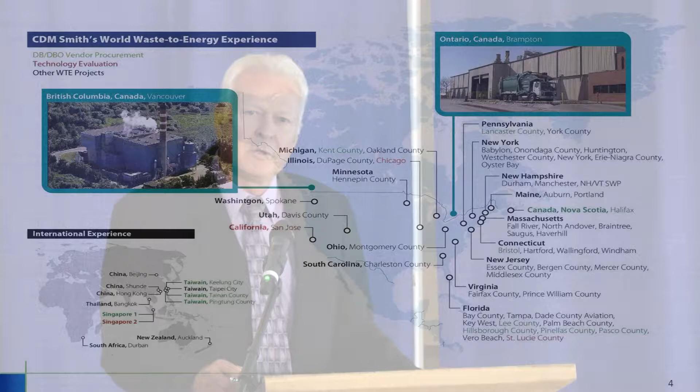Just recently, the map doesn't reflect this, but we're about ready to wrap up our involvement with the facility in Dublin, Ireland. They just built a brand new 2,000 ton per day facility. And I hail from Tampa, Florida.

We have quite a few solid waste professionals in Tampa. We do a lot of work in Florida. Florida has the highest number of waste to energy facilities in the United States, with 11. So that's a little bit about who CDM Smith is.

My career, 27 years ago, after 17 years in the commercial nuclear power business, I decided to do something a little less complicated but more exciting. And I became involved in a solid waste project as a construction manager.

So I showed up for work one day and in less than three years helped build a plant just north of Tampa. I showed up on day one of that project, but surely there were meetings like this, workshops, part of a feasibility study that all took place years in advance of my first arrival on that project. And so I think this is a similar situation here.

This is the beginning of your effort to figure out what you want to do, where you want to do it, how you're going to do it, and when you're going to do it. And those same decisions had to be made by the commissioners of Pasco County, Florida. And sure enough, they did.

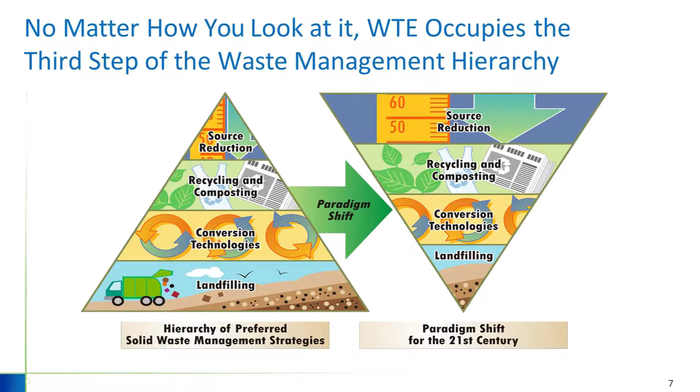Just a simple little diagram, but it paints the picture of what we're trying to do. This little diagram here on the left shows who's doing the work, okay? Today in America, landfills are predominantly doing the work. 83% of the waste is put into landfills today. What we're really trying to achieve is a paradigm shift where we're turning that pyramid up on its head. We want to do less work in the landfill and more work with the other rungs of the hierarchy.

So what I'm here to talk mostly about today is the waste conversion rung, the third rung. And included in waste conversion, we have waste to energy.

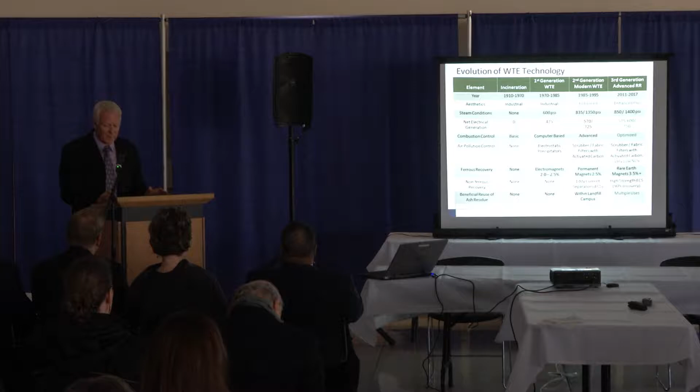So a lot of people make their living in this industry, and it's changing and advancing every day. It's not stagnant. Just because we haven't built very many of these facilities in the last 15 years doesn't mean this industry is stagnant. We are rebuilding these facilities, we're expanding these facilities, they're building them left and right in Europe and China. So we can take advantage of all of that in your situation. You certainly want to leapfrog where everyone else has already been.

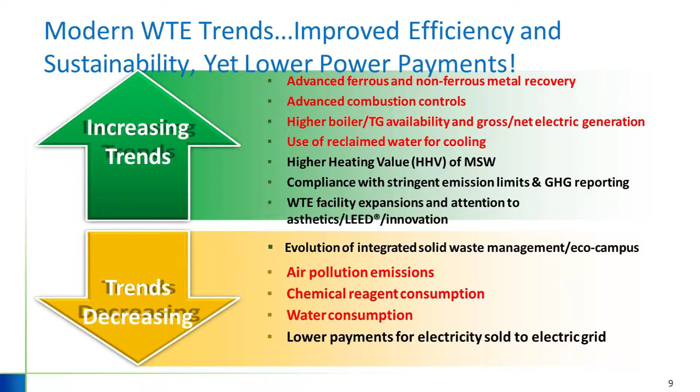But the last little bullet there is lower payments for electricity sold to the electric grid, and that's the sad news. And I have some suggestions for that. So this is just a short list. I have a long list of benefits of waste to energy to the electric grid.

And I want to bring to your attention something I discovered last week. The Department of Energy has recently proposed that any power plant that can store or stockpile 90 days of fuel should be compensated for that attribute, because of Superstorm Sandy and hurricanes and forest fires and things of that nature, or the polar vortex. All of these things are very disruptive on the electric grid. And when the wind doesn't blow and the sun doesn't shine, the renewables aren't going to get you back on the grid. You need baseload power sometimes to recover from these types of incidents.

So the DOE is now proposing, and this is beneficial to the coal and the nuclear industry primarily, let's be honest. But the fact of the matter is a waste-to-energy plant has an endless supply of fuel, especially after an extreme weather event. Just in my neighborhood, I live in Tampa, just this Saturday, they finally picked up the rest of the debris that's been on our curbs for the last 2 months after Hurricane Irma. So these natural weather events can really increase the fuel supply, if you will.

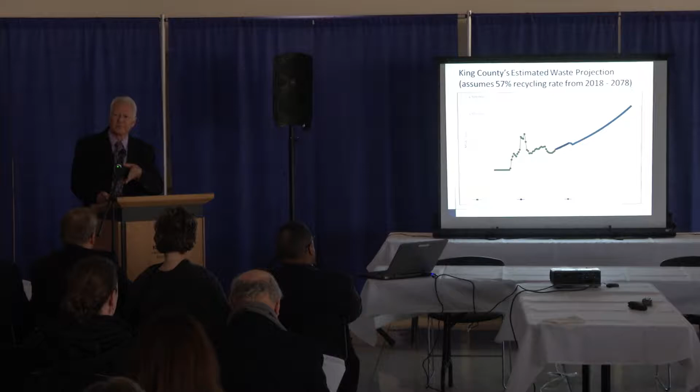And so anyways, that concludes my introduction. So in following Curt's lead, are there any questions over what I just shared with you? Do you want to ask anything at this moment?

My question was that you were talking about this being close to the grid in the community, but the report says you need 20 to 40 acres to build a facility to serve King County. So I made the assumption that sites are being selected and communities being spoken to, or are we just too early to do that yet?

No, again, we weren't really challenged with helping find a site at the moment. The 20 to 40 is a reasonable estimate. I've seen, and it depends on the size of the facility. I saw a facility in Alexandria, Virginia on 3.5 acres, and I swear there isn't a blade of grass on that facility. And you could never do that again, because today you have stormwater management rules. So typically, 20 to 40 would be a reasonable amount of property.

Again, it depends on the size of the plant, and if we harvest the rainwater and use it in the process, which we'll talk about in a minute, then you don't need so much real estate for stormwater treatment and stormwater collection. So I would say 15 acres would press the limits on the low end for the type of facility you're talking about.

Thank you. Okay, so now we're going to talk a little bit about your existing conditions here. In the light blue, that's the waste projection curve from 2018 through 2078, a 60-year horizon. As you can see, it's accelerating. It's growing quite rapidly.

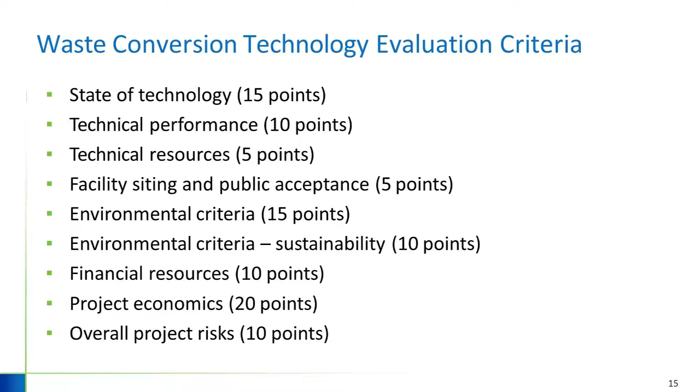So we have two technologies that we call proven: mass burn waste energy, that's thermal combustion on a movable grate; advanced thermal recycling, ATR, which is very similar—that's what they often call it in Europe. We also looked at RDF facilities, refuse-derived fuel facilities, and then gasification and pyrolysis technologies.

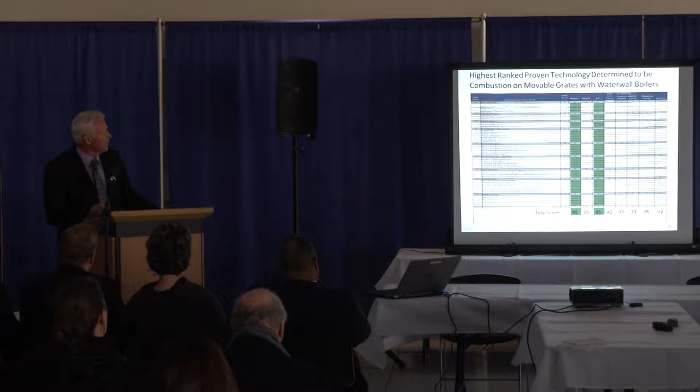But anyways, the bottom line is that mass burn, thermal processing on movable grates with a water wall boiler—that's tech talk, but I'll show you what the grates look like—and the water wall boilers are just tubes that encase everything and capture the heat. Mass burn and ATR were the highest ranked, so that's what we would recommend for King County to consider today.

You don't want to be first on new technologies. You may not even want to be second. You want something that's proven. You want something that's reliable, robust, and has met the rigors of time. That's what these technologies have done.

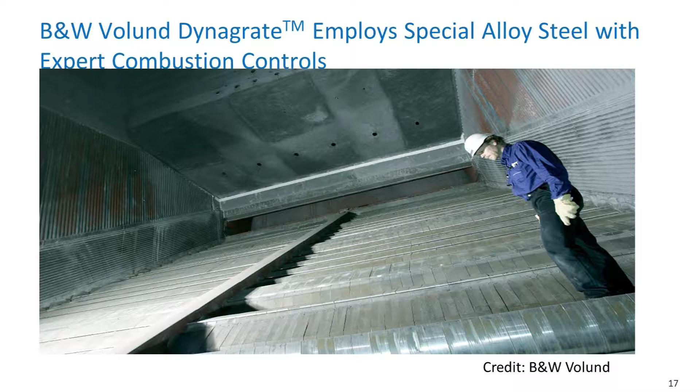This is a grate, a modern grate system. This is the furnace of a small boiler, provided by B&W. This is their magic grate, which was recently employed in Palm Beach County for the first time. It's called their Dynagrate, and it's very clever.

It's water cooled, so each of those runs is on an incline. The waste starts at the top and migrates down, and those grate bars are constantly rotating and moving, just like a stoker—what you'd do at your fireplace at home. You'd stoke the fire when it starts to burn down a little; you want to agitate it. So these furnaces are constantly agitated.

They use alloy metals, and they have Inconel on the walls of the boiler tubes—this is it. This is an engineer's dream here; we get excited about this stuff. But it represents some major technical breakthroughs.

You get far more reliability with a water-cooled grate. You don't burn as hot, you don't melt stuff as much. And the Inconel, it's like good and plenty—it lasts a long time. Whereas in the old days, you'd have to rebuild your boilers every 3, 5, 7 years. We're getting a lot better life out of these things today.

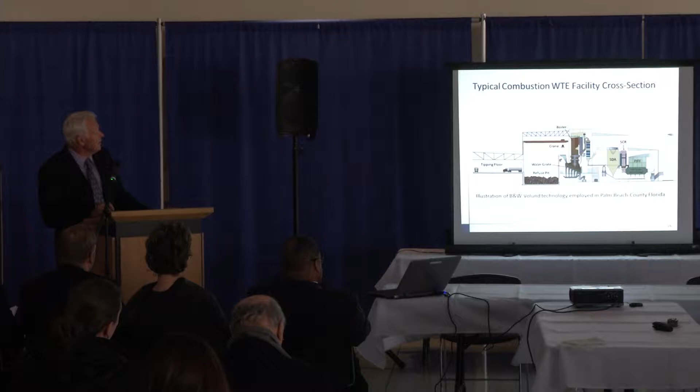And this is a cross-section—this is a cross-section of the new plant in Palm Beach County.

Fully enclosed, a tipping floor where the waste is received, a pit that stores anywhere from 8 to 10 days worth of fuel, and a crane that picks it up and feeds it into a furnace. It flows by gravity onto those grate surfaces that I showed you, where it's agitated and combusts thoroughly. The heat's recovered as energy, and then the exhaust gases are heavily scrubbed by a scrubber, a fabric filter, and in this case what's called an SCR, a selective catalytic reduction technology, to further remove some of the NOx compounds.

NOx compounds are precursors to smog. It's the pollutant du jour in this industry, the last of the pollutants that has to really get more thoroughly addressed, and it is being addressed.

So again, garbage in—you can see a grapple picks up 8 to 10 tons at a grab and feeds it into the furnace—and what comes out is significantly reduced in volume and weight, and it's been sterilized and stabilized. That ash, when put in a landfill, doesn't create methane, doesn't give off bad gases. As a matter of fact, the leachate from a modern ash monofill almost meets drinking water standards, with the exception of chlorides, salts, and sometimes aluminum. So it's fairly clean material.

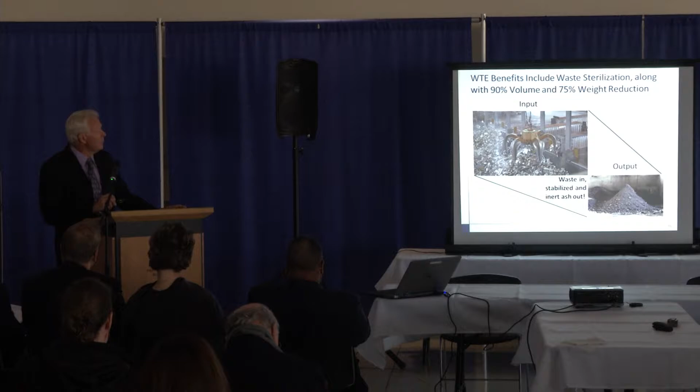But the 70% represents a huge opportunity for combined heat and power projects. These are typically done in the northern climates, where you need district heating, where you can use steam for heating cities. Indianapolis is the furthest south—Nashville still has a thermal system, but they use natural gas now. Indianapolis uses waste and provides steam to their heating grid, but most of the heating grids are in the northern climates, and Europe has a lot too.

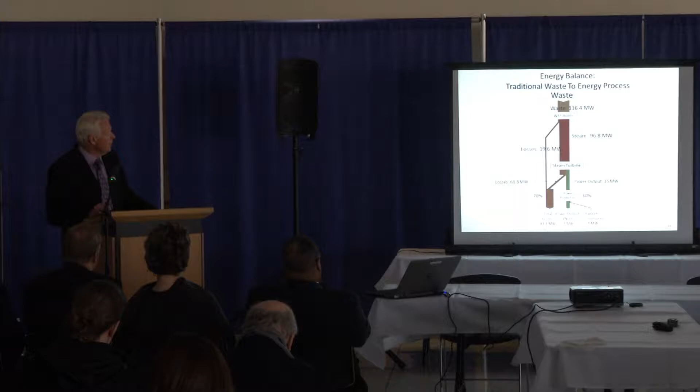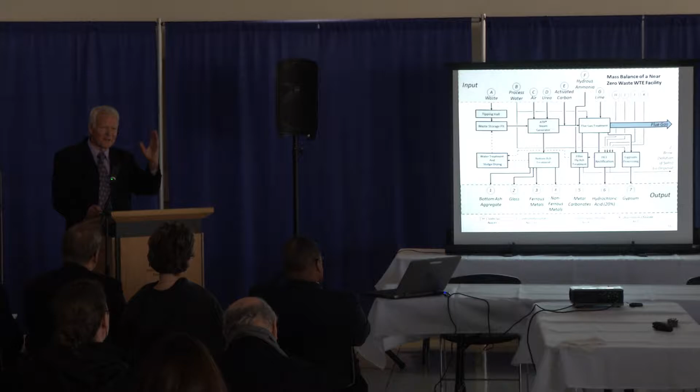So that really covers the existing conditions for your system. But I'll point out that you have 8 transfer stations, 1 landfill, and a privately operated MRF, or several MRFs. So you already have some of the major elements of an integrated solid waste management system.

So what we did is ask, how do we size this facility? One option is that we could size it so on day 1 it's running at full capacity. But what happens is, because your growth continues over the next say 20 or 30 years, you end up with excess waste—bypass waste, as we call it—waste that has to go somewhere else, whether to a recycling program or to the landfill. That was one option we looked at.

Some of the advantages are that you're running full steam ahead—you're not throttling your plant, you're always at maximum power. You have a smaller facility, lower capital cost, and it forces you to deal with your excess waste in some other way, i.e. recycling. That would be the preferred option, or at least that's what people would tell you.

So the disadvantages include you have excess bypass waste that you now have to deal with, and it eliminates the opportunity for a regional project, because now you don't have any other capacity to offer any of your other communities that may want to send waste your way.

We chose instead to do what we said, eliminate bypass waste. We were going to size the facility so that it had excess capacity on day one, and was at full capacity at the end of its financing period, whether that was 20, 25, or 30 years. This results in a bigger facility with a higher capital cost. It gives you excess room to grow into, and excess capacity to market to neighboring communities or special waste programs. So that's what we chose, and I'm going to show you illustratively the diagram.

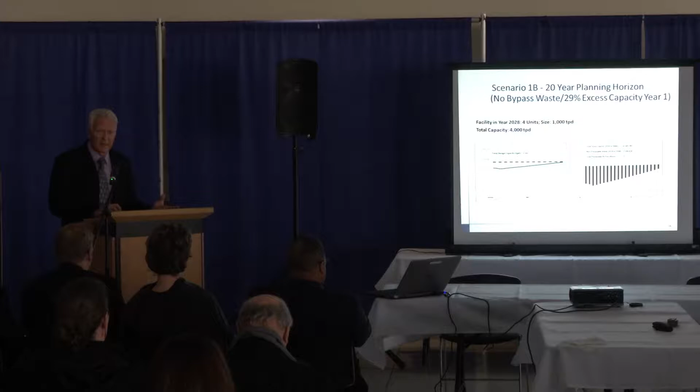On the left you can see your waste projection curve in red, and the blue line represents the size of the waste energy plant, in this case 4,000 tons per day. That line intercepts the curve in year 20. So all the area underneath here is excess capacity that you either use to your advantage or just run your plant at a lower rate. This diagram shows you have excess capacity early on, and as time grows and your waste stream grows, you're slowly converging on where those two points meet. This is a 20-year scenario, and in this case, the initial size has 29% excess capacity.

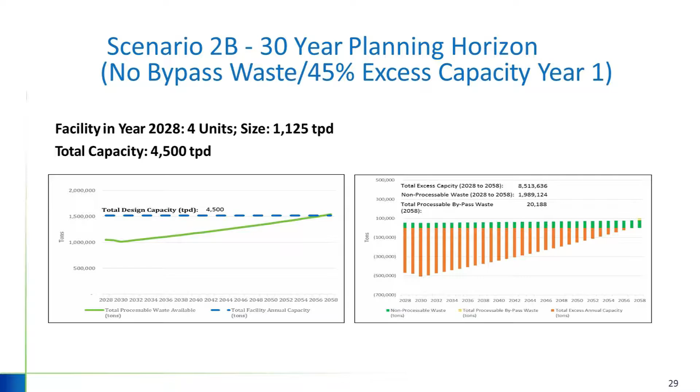Then looking at the 30-year scenario, same story, only now you're looking at a longer horizon, and where those two lines meet now requires a 4,500 tons per day plant. It's a bigger unit, costs more, and again has a lot more unused capacity that you could market, or it's idle.

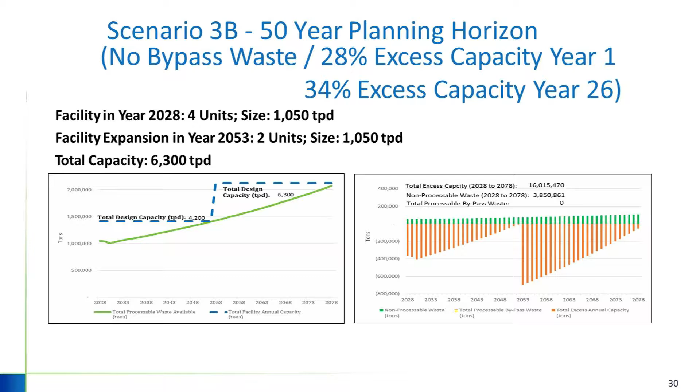Then looking at a 50-year scenario, we went to the midpoint, 25 years, and sized the plant for 4,200 tons per day, then in year 25 added another, whether a new plant or additional capacity remains to be seen, but 2,100 tons a day of additional capacity are required midway through in order to intercept that growth curve at year 50. So again, you see excess capacity declining over time. The new unit comes on, or the expanded unit comes on, with excess capacity until you get close to the end.

So those are the three scenarios that we looked at.

And just to give you some comfort about the size of these facilities, you're not the first. There's a facility in China under construction today being built for 5,612 tons a day, 6 units, using that B&W technology I showed you a picture of, also employed in Palm Beach County, Florida, a very similar unit. Palm Beach County was the last plant built in America, in 2015. It has 3 units of B&W, 1,000 tons per day each. Honolulu expanded recently with 1 unit, 900 tons a day.

It uses Martin GmbH out of Germany, and it's been in operation for the last 5 years. Pinellas County, Florida is like the granddaddy of these facilities. It was built in 1985. That's why we're spending so much time there now, putting Humpty Dumpty back together. It's 37 years old, with 3 Martin mass burn units at 1,050 tons a day. Delaware Valley, Pennsylvania has 6 rotary combustors. They don't make them anymore, but nevertheless they're there, with a total capacity of 3,510.

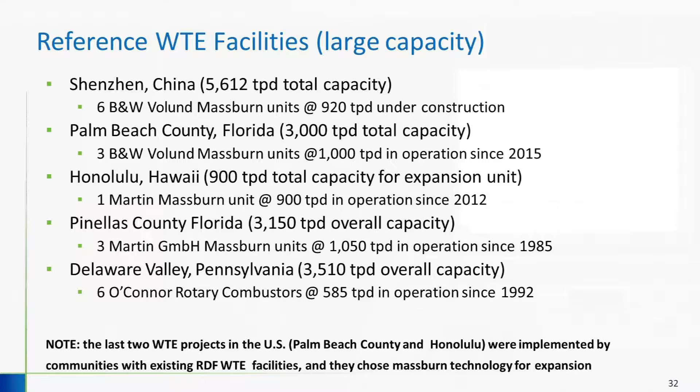So there are a lot of large plants out in the world that we call reference plants, so you don't have to be frightened that you're stepping into the never-never land where no one else has been. Also note that the last 2 plants in America were done by communities that already had a waste energy plant, using RDF technology where they processed waste through shredders, conveyors, and magnets. They chose not to pursue RDF technology, and went to the mass burn option instead, which is very much in line with how we feel. Mass burn technology is proven worldwide in 1,000 installations, and there's a lot of people making it better every day. That's where you want to be.

I'm going to talk a little bit about some of the benefits that we've discovered through all our research on these other communities that own these plants.

Internal use of electricity: Hillsborough County, Florida, where I live, surrounds Tampa. And then Lee County, Florida. Both of those facilities use as much power as they can for their own campus, their recycling solid waste campus. It's not a lot of power, 2 megawatts in Hillsborough's case, probably less in Lee County's. But what it represents is cities and counties not taking it on the chin anymore just because they're getting paid less by the utilities. They're going to find a way to get some better benefits out of their projects. I'll show you some photos later.

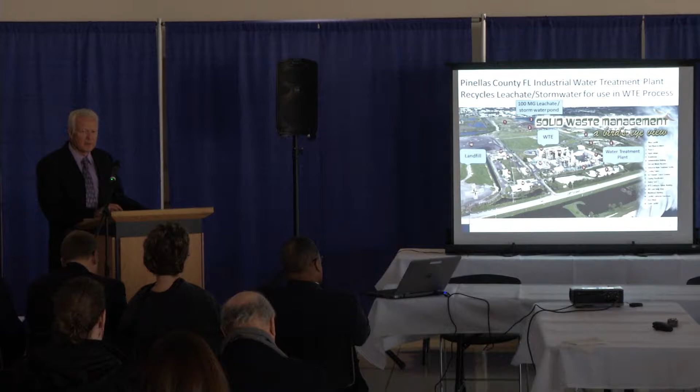This is the Pinellas County example I want to share with you. There's a pond up here that stores 100 million gallons of water from the landfills. There's a landfill here, here's a landfill here, and there's probably one back here. All of that water is then sent to the water treatment plant. They built this right here three years ago at a cost of $15 million. So they're treating 1.5 million gallons of water from that pond, and they're feeding it to the waste-to-energy plant as processed water for cooling, for boiler water makeup, that sort of thing, for fire protection.

So here's an example of a community that is very similar to what you have. You have a landfill, you have a pond or a series of ponds, you have treated waste or leachate, and what you don't have is a waste-energy plant or a water treatment plant. You're sending it to your neighboring wastewater plant. But anyway, it's an example, real world, in motion.

So, summary of the features that we would propose for King County: advanced combustion on a movable grate with a water wall boiler—that's mass burn, okay? Today they have expert combustion control systems. What does that mean? That's like the autonomous vehicles we're hearing about today. That's like those jets that Boeing built. That's like your cars today.

All the sophistication, the instrumentation, the anticipatory controls—it's being applied universally, including in this industry.

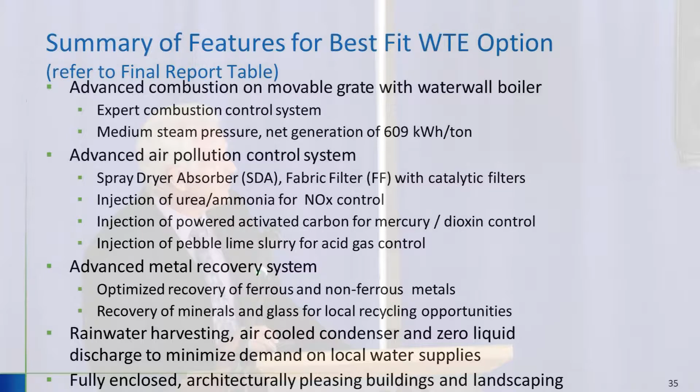Medium steam pressure, we're going to generate 609 kilowatt hours per ton. Advanced pollution control system, just like Palm Beach County, with the exception of SCR. We're not proposing SCR technology just yet—that would be a decision for the community. Palm Beach, I'll tell you, it wasn't their preferred solution; they were sort of pushed into a corner by the Florida DEP on this. But anyways, they went along with the SCR. We're not proposing that for you this time—just a standard, normal, advanced air pollution control system that works today in America.

Advanced metal recovery—now, Palm Beach County does not have an advanced metal recovery system, but this is widely deployed in Europe and being implemented here in the States. Spokane's ash is being processed by a company called Lab USA in Roosevelt, Washington, and they're taking all the ferrous and non-ferrous metals out of their ash at a remote site. So there are a couple of vendors from Europe saying, we know how to take apart your ash stream, and we can recover the metals quite nicely.

Rainwater harvesting, air-cooled condensers, zero liquid discharge to minimize demand on local water supplies—we would definitely promote that no matter where we go today. Water is just too critical to use randomly. And then fully enclosed, architecturally pleasing building and landscaping. That's a snapshot of what we think would work nicely here in King County.

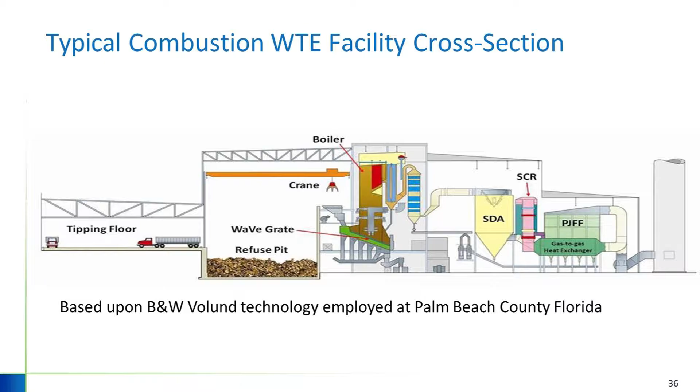That's a rendering, Palm Beach County. That's a 2 million gallon storage tank—we harvested the rain from 7 acres of roof. So let's call this an industrial scale rainwater harvest system, probably never done anywhere else in the world at this size. That tank stores enough water to meet the demands of this facility 15% of the year.

Architecturally, it's quite nicely jazzed up. The chimney isn't too much—nothing too architecturally unique about it, except that it's oblong, so it had a lower or slimmer profile when viewed from the north. It has an air-cooled condenser, so it doesn't use a lot of water for cooling. Cooling towers typically give off big plumes of steam, which a lot of people don't appreciate either.

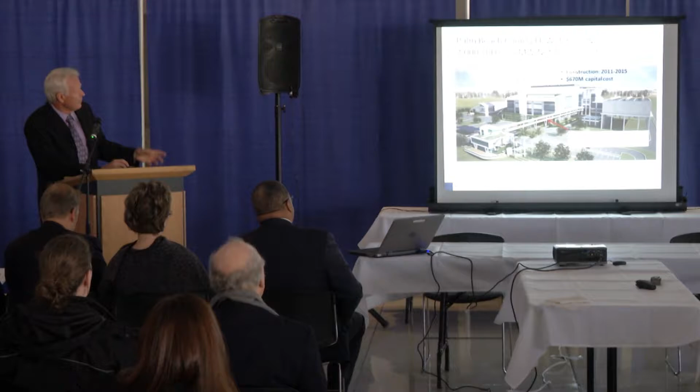I was on the proposal team where we worked with B&W and won this job, but I didn't have my hands on it like I did at Pasco—I wasn't involved with the construction. But nevertheless, you can see it is quite nice. This particular plant has an existing 2,000 ton per day RDF facility, and right beside it is the new 3,000 ton per day mass burn unit.

A close-up of the education center—it's LEED platinum. It has a solar canopy on the parking lot, and it too has a rainwater harvest tank; it's back here, you can't see it. In Florida, you can do a lot of instant landscaping overnight, boom. So it's quite nicely done.

The tipping hall, where the trucks come in—remember I said you have 8 transfer stations? Well, in Palm Beach County, they have 6, and most of their waste is delivered in very large transfer trailers, much like yours. This tipping hall has 24 truck bays, and the tipping floor is as long as a football field, including the end zones. That is supersized—I've never seen anything like that anywhere—but Palm Beach County thought that was appropriate for their system.

The site is very nicely compacted, 24 acres, which includes stormwater treatment. Over here there's a pond that doesn't show, but notice the dimension of 1,000 foot by 1,000 foot—that's essentially the footprint this facility was built on. I'll just remind you that you have a 1,000-foot buffer around your Cedar Hills landfill, okay? So I'm just dropping a hint—1,000 foot, we can squeeze it in.

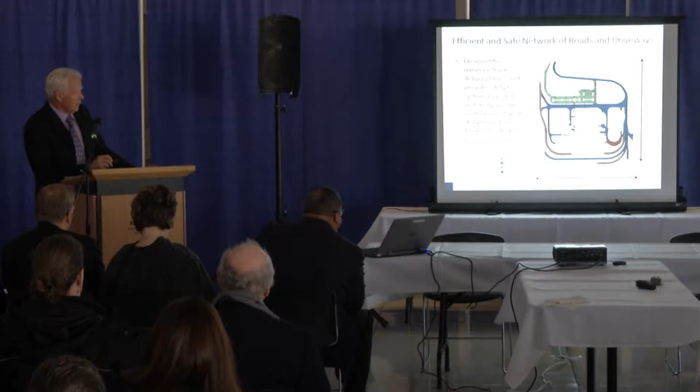Actually, we can probably even make it tighter, but Palm Beach County has an advanced air pollution control system, which includes SCR, selective catalytic reduction - that's for the chemical engineer in our crowd. They use catalysts to basically convert NOx compounds into elemental nitrogen. So it's all nicely designed and built by B&W. They do all that kind of work.

And I'm going to pause here. Philip's going to come up and talk a little bit about European technology, but does anybody here want to ask any questions on what I just presented? Go.

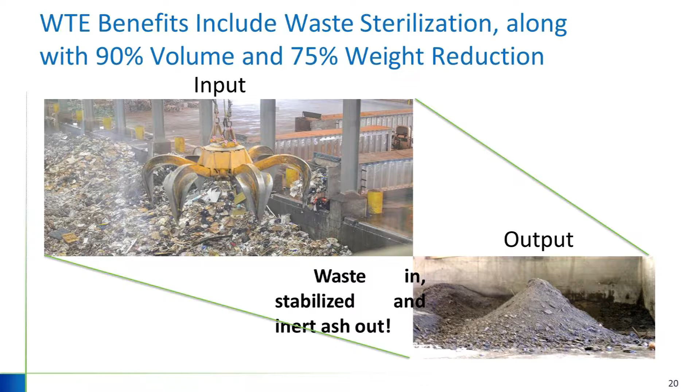Regarding the inert ash, back on slide 20, in your studies and discussions, did you talk about that ash going to road beds? Yes, and I'm going to get to that after Philip's part of the presentation. So yes, there's a number of ash recycling technologies that might fit in very well here, and we will get to that in a minute.

Anybody else want to ask a question? Yes, sir. Or yes, ma'am.

Could you talk about the life of the equipment you're proposing to build? How long would that last for the initial construction? That's a good question. Some pieces of equipment wear out in 5 years, some of them go 20. And again, it depends a lot on the level of quality that you build into the plant at the onset. The boiler tubes, depending on what part of the boiler they're in, can be replaced on a 5-year cycle, a 7-year cycle, or now we're seeing 10-year cycles and maybe even longer through the use of Inconel. I can go to some facilities where the boiler feed pump is 25 years old, never been changed. Other facilities like Pinellas just recently had to rebuild their boiler feed pumps. So heat exchangers, the tubes kind of foul and get corroded, and they replace them periodically. So I'd say the average equipment replacement cycle is somewhere between 5 and 20 years.

Yes, sir. It doesn't matter if you're at full capacity or not full capacity, right? Because the machines still have to run. Yeah, the turn-down ratio - they can operate these facilities at like 75% throughput. But obviously, if you can run it at 90% or 100%, you'll be able to pass more material through it and do more work with it. But no, you can turn it down to like 75%. Now, in the case of Pinellas, a 3,000 ton per day facility, back in 2010 when the recession hit and everyone bottomed out in terms of waste generation, they were shutting boilers down on the weekend, on Sunday. They ran out of fuel. So, well, if you run your equipment at a lower rate, then you get better performance over time, so it doesn't wear out as much.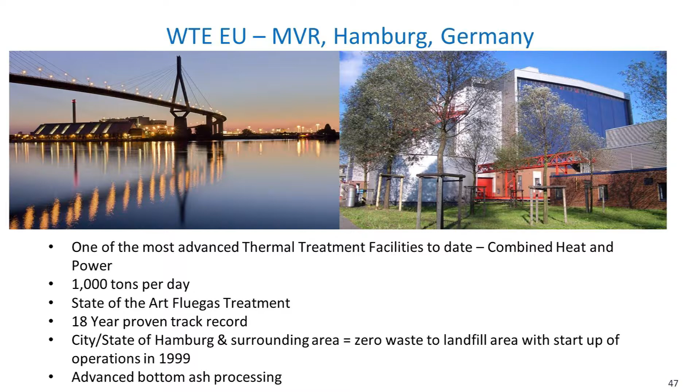You're talking about dioxins and furans, and that's a discussion that came up, and I can address it briefly. They're no longer seen as an issue because they're taken care of. They're monitored around the clock, and the emissions are made public via newspapers and public forums at least once a year for most facilities, and they're put in context.

The governments have reported on this in Europe, saying dioxins and furans in waste-to-energy are no longer a concern. They're no longer a health issue, we don't have to worry about them. This is a common fact in European legislation.

Also interesting about this facility is that it's been utilizing zero waste to landfill. It's been utilizing the bottom ash, and we'll see that later too. They separate the non-ferrous metals out of it, and they're able to use the bottom ash as an aggregate in construction projects.

It has state-of-the-art flue gas treatment, and it uses combined heat and power. There's an adjunct port that gets about 10 megawatts of energy. It supplies a factory that used to use fuel oil, about 80,000 tons a year, and now they're using the steam instead, replacing heavy fuel oil and reducing the carbon further.

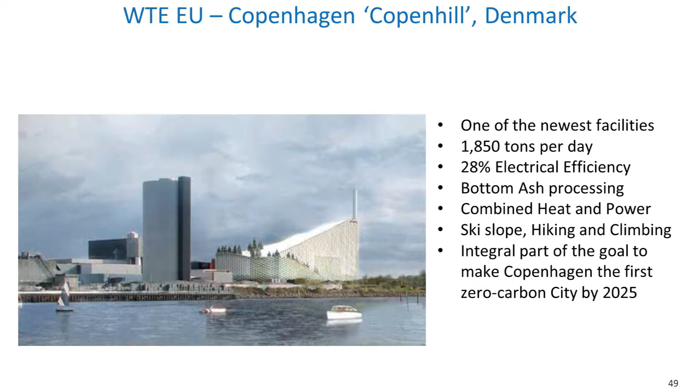There are criteria, EPAs, regulatory frameworks that set these limits, and they're way below them. We talked about NOx levels - there are 2 facilities operating right now, one in Norway I believe, and the other in Sweden, with less than 5 parts per million on NOx, which is almost non-existing. We talked to the construction companies, the builders of the technology, and they can meet a 2 parts per million criteria just by adding more filtration systems, more membranes to the SCR filters. So if it's desired, like in California, it's a possibility.

Interesting about this one too is that it's an integral part, as stated by the Danish government, of making Copenhagen the first zero-carbon city by 2025. Landfilling doesn't fit in that scenario. Waste-to-energy does, in this case, the way it's seen.

The next facility we looked at is in Brescia, Italy. It's been operating, I believe, for about 12 years now. As you can see, it's also an architectural concept - I drove by there again this summer and you don't even see the smokestack, the way it's integrated. Most of the time you don't see anything coming out. If it's over 70 degrees Fahrenheit, it's because it's mostly water, about 99.99% water, so you just won't see that.

It's stated with the Italian government that this avoids 760 kilograms of carbon dioxide per ton of waste over their state-of-the-art landfill, which is adjunct, right there. It also provides combined heat and power. The tipping fee is $65, and it's a 1,600 ton per day facility.

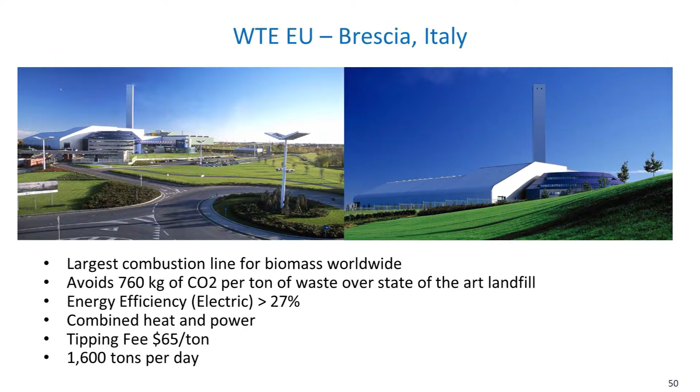What's interesting is that many facilities can also include wastewater and sewage treatment. If you need to get rid of it, there's a certain way you can do that, and this facility does.

This is another, a little bit more industrial-looking and older facility, but it's the largest in Europe, and this is in Amsterdam. So we're jumping all over Europe. They have over 600 facilities and are building more. What's interesting about this facility is it has 27 neighbor municipalities - we have 39, but 27 right there.

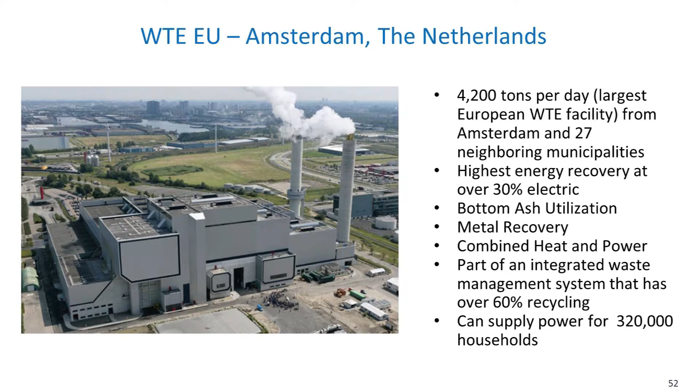It has the highest energy recovery of a facility, at over 30%, in the form of electricity. That's important to say: the more electricity you produce, the less efficient you usually are. So even though this facility recovers 30% net output, if you go into combined heat and power you can get 70, 80% plus. But the focus here was really to see how efficiently you can design the structure for electricity efficiency.

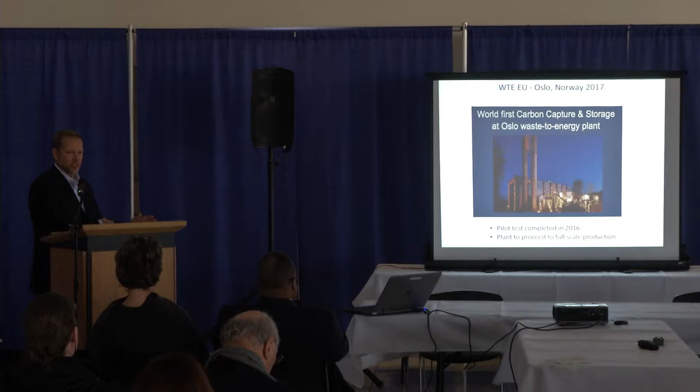The reason I'm bringing up terminals is because it's built on bottom ash. It saved 40% in construction cost. It's right next to the water and it's a very user-friendly product. Like with settling, they had to pull up certain areas once in a while, and every time they pulled it up they were able to reuse that material and close it up, with no settling.

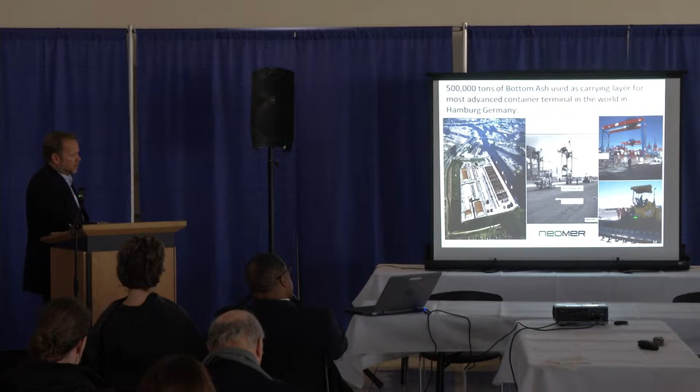And here's just an application where you can see a machine putting something on top of it. Also, this is called the cruise terminal - we're missing the 'I', it's the same thing. The cruise terminal is also in Hamburg, built on bottom ash. The interesting story is that they had overcapacity for the port of Hamburg, which continues to grow. It's the second largest port in Europe.

It's one of the largest, 10th or 11th largest in the world, and they had overcapacity coming in. They needed to unload some ships. While this terminal was being constructed, built on bottom ash with no top layers, they laid a whole bunch of it, and within 24 hours after the ash was put down, they put containers on it and it didn't move because it was so solid in structural integrity. Once they freed up the space, they continued construction of the terminal and just laid the layers on it. There was no settlement or anything like that.

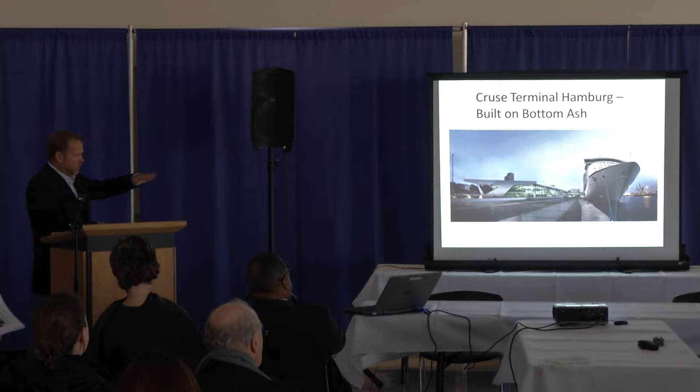If we can recover 4% ferrous and 0.8% non-ferrous, that's equivalent to about 2.7% of your overall recycling rate. Right now we're assuming a 57% recycling rate without waste-to-energy. With advanced metal recovery, that becomes 59.7%, and if we can recover, say, 95% of the bottom ash for reuse, we can jump your recycling rate all the way up to 70.6%.

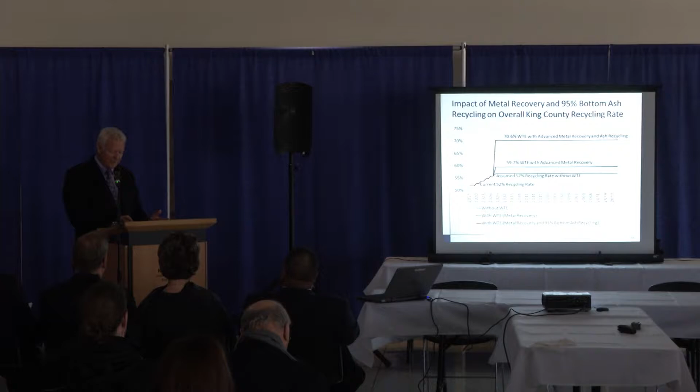That's a pretty significant jump because of the law of diminishing returns. You can make gains in recycling, and we've done so over the last 20 years just by implementing curbside programs and things of that nature. But going after and getting more becomes harder and harder as time goes on. Anyway, that's the potential we're talking about.

This is the second generation plant—these are most of the plants today. The Grizzly Overs, the +6 materials, always has the kitchen sink. The -6 materials are both recovered by magnets, ferrous metal recovery magnets. This is a pile of non-ferrous.

In America, typically we're recovering the +3. A lot of this material actually melts and solidifies and turns into what I call a nugget—there's a nugget showing right there. Some of these other items are brass, bronze, copper, and that sort of thing that I've cleaned up and washed, just so you get a feel for the strange and mysterious parts that somehow fall out of the waste stream that are now recoverable. I call that being liberated. The combustion process disassembles those materials, and with technology we can now get it out.

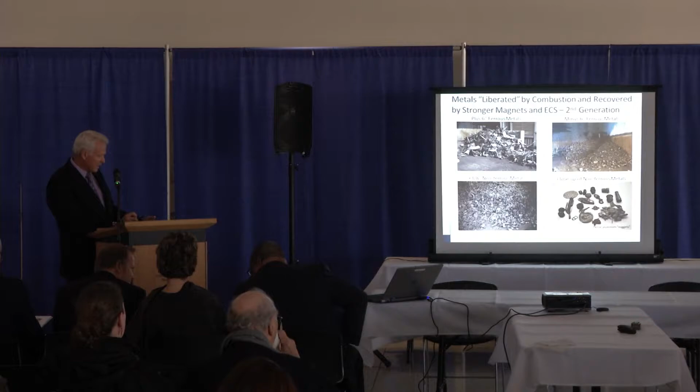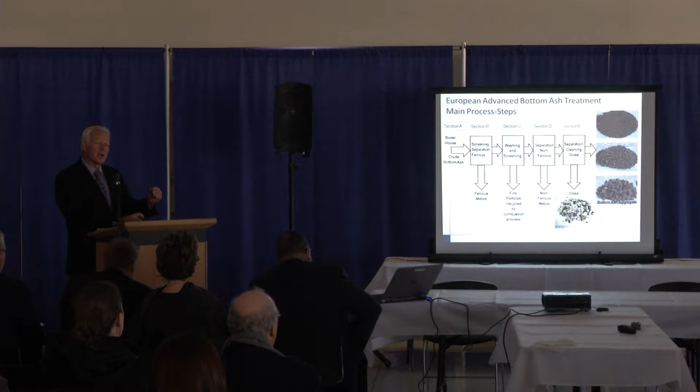Europeans go beyond what we're doing in America. They're now recovering the glass and washing the glass. They're also recovering ferrous and non-ferrous metals, but they're going after fine particles too. You can see some of the various aggregates—they're screening and sizing them for different properties, for road construction or sub-base and base type applications. Europe continues to lead the way.

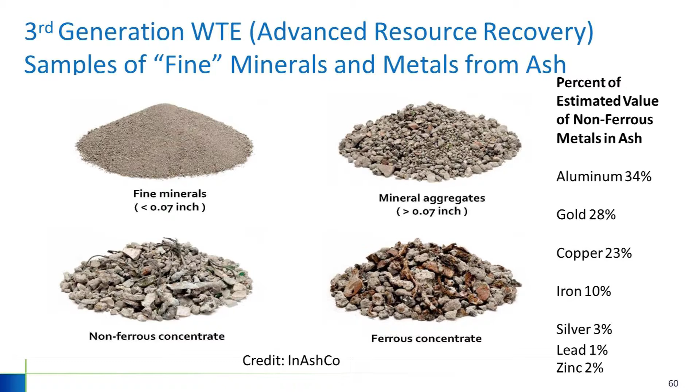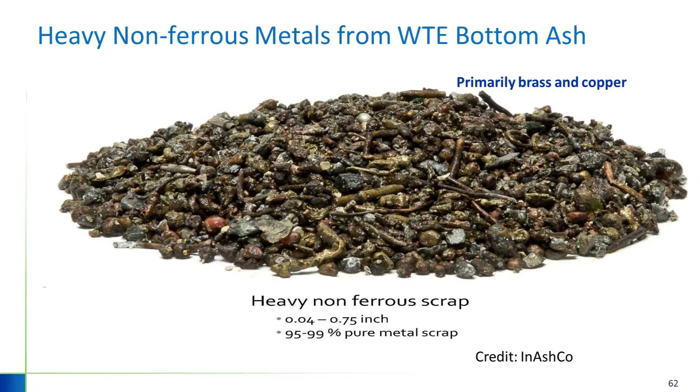So now, talking about the use of bottom ash for recovery or recycling—when you pull all those metals out, your aggregate now looks like aggregate. It's not ash with a bottle cap in it, or a Pop-Tart, or a nail, or part of a metallic object. It looks like the real McCoy, and it can serve as road base, structural fill, flowable fill, and be used in asphalt and concrete pavements. It can also be used as a feedstock for the manufacturing of Portland cement.

Portland cement is the gray stuff that you buy in a bag, and if you open the bag up, it always explodes into a dust bomb. That's Portland cement. That's what you use to make concrete.

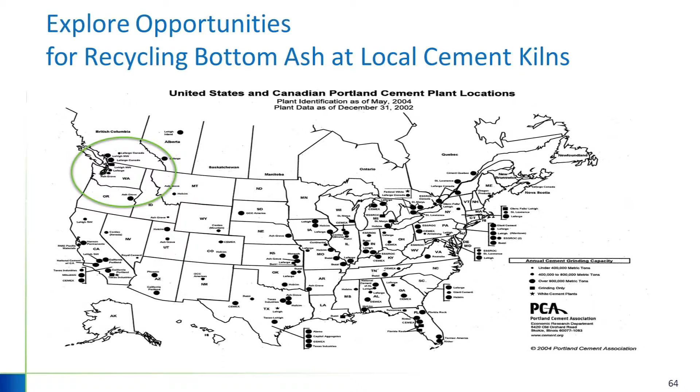You have quite a few up in your area. There's one in Miami, Florida, where they did test burns back in 1993 using bottom ash, and it worked quite nicely. They're now thinking about implementing that program again starting next year.

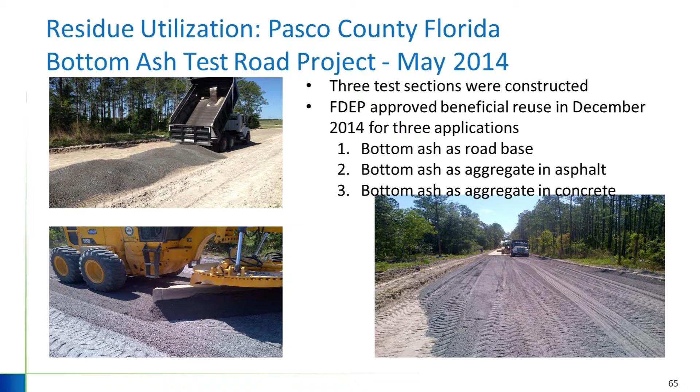Pasco County, Florida, just north of Tampa, recently got permission from the Florida DEP to use bottom ash in road base, as an aggregate in asphalt, and as an aggregate in concrete. Concrete, that's the stuff we drive on. Okay, so that's in motion.

So that's one of the things we think you ought to consider, entering into discussions with the local cement kilns to find out what their interest might be in using these types of materials. A golden opportunity. Now we're going to switch gears and talk about financials.

So we developed this financial model, and we used a very conservative set of parameters because King County Solid Waste Department told us very clearly they wanted to know what the all-in cost would be. What is it they could expect to see from a project like this?

Our capital costs were based upon Palm Beach County as the reference plant. We adjusted for inflation, bumped it up for the seismic zone here, added the sales tax, added owner costs, and added $5 million for site acquisition. That's just a place marker. We added $15 million for an advanced metal recovery equipment and building.

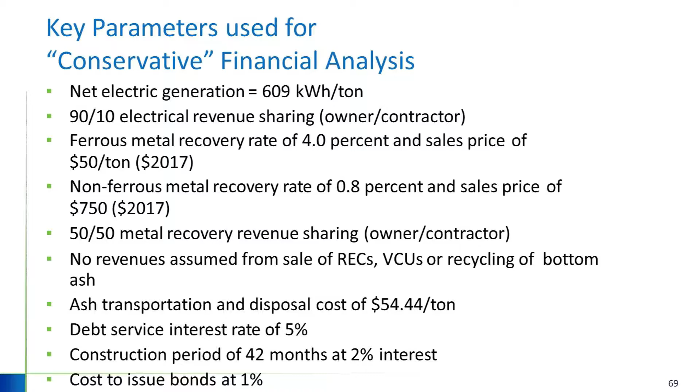Construction period of 42 months - that's what it took for Palm Beach County. Maybe it can be done in 36, depending on the size, your weather, and that sort of thing. So those are the parameters we used.

We used an O&M fee. The contractor gets paid $23 in that range, depending on the size of plant. There's always economies of scale as you size things up. But remember, he's getting a share of the electrical and metal revenues here. So some people might look at those numbers and say those are way out of bounds - those guys want $30, $35 a ton. Yes, they do, but they're getting some revenue sharing here.

The county annual management costs are $210,000 a year. That assumes one new person, a project manager, who just monitors this project continually. Environmental consulting, that's me - $350,000 a year. That's typically what a community will pay us to serve all the monitoring and operational issues over the course of a year.

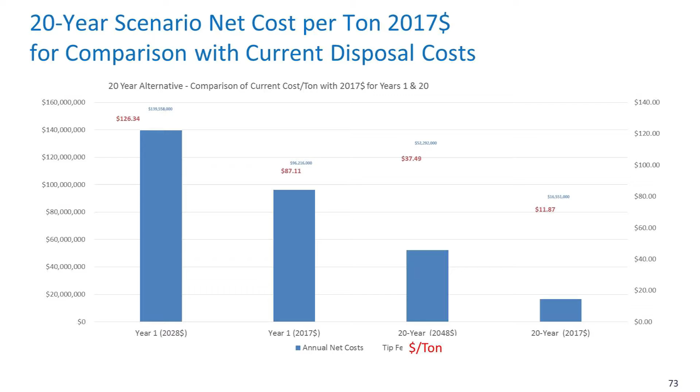And in 2048, where I called it falling off the cliff, that number's $37.49, but in terms of 2017 dollars, it's actually $11.87. That's a bargain, and we wanted to bring that out. We wanted to show you that there's a lot of difficulty in interpreting some of these numbers when they're that far out in time.

So we did the same analysis for the 30-year plant, and the reason you start out a little lower - this was 126 in the 20-year scenario, now it's 109.

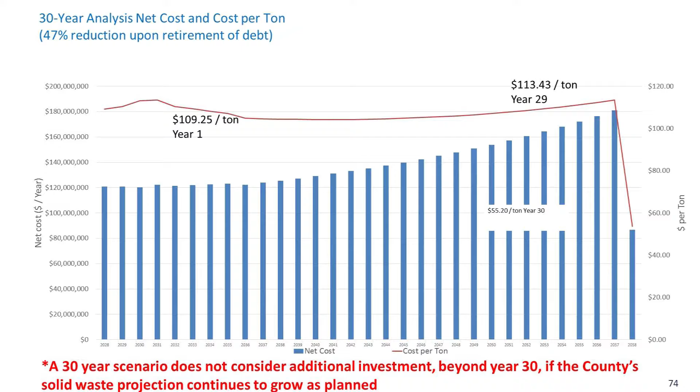The reason that's lower is because you're stretching your debt payment out over a longer time, so your annual mortgage, so to speak, is lower. And then at the end, when you fall off the cliff and pay your debt back, you're not falling as far because you stretched out your payment over time. And so that's what the 30-year cycle looks like.

Yes, sir. I thought earlier that you talked about to rebuild the facility is every 5 to 10 to 15 years. Oh, that's just pieces of equipment. Pieces of equipment. Yeah. So, but that's not built into this cost, right?

So where your revenue is just paying for the facility, it's not to rebuild the facility. Like you got a graph that goes out 30 years. Obviously, it's going to need to be rebuilt during that period of time, most likely.

So here's what we consultants say. If your contractor is operating and maintaining that facility the way he's supposed to, and you're watching him closely, and you're beating him up over it every year, you will not have to make a major capital investment for a 20 or a 30-year cycle. We're seeing this in Hillsborough County, Florida, where a lot of that equipment is still running after 27 years, and it's doing very well.

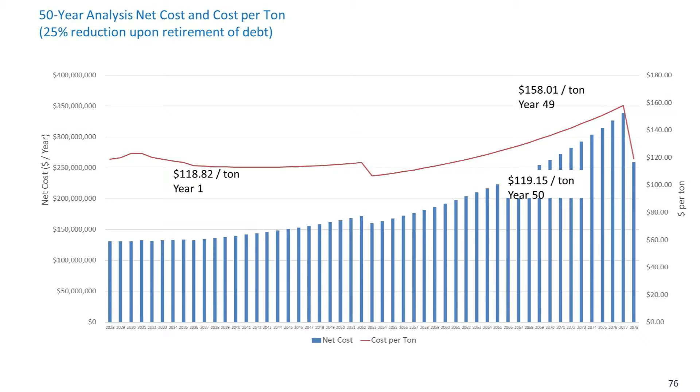I know a lot of this is confusing, and it took me a long time to really scratch my head over it. I didn't do this analysis. We have a financial planner that does this kind of work, and this is what she prepared.

And now, just to put things in perspective, for year one of these projects, the electric sales account for 85% of your revenue stream. Your metals, non-ferrous, 11%, and your steel is 3.7. So metals are low order, but they could be more based upon what I showed you about the way the Europeans are cleaning and sizing and segregating them. And again, this represents a 90%, 10% share of the electricity and 50-50 share of the metals.

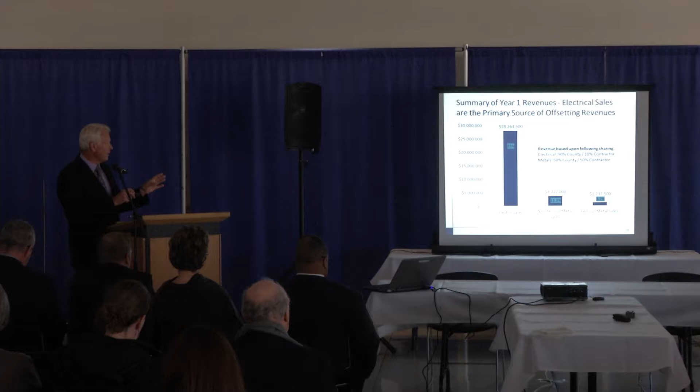That could be 100% zero if the county chose to, but then your O&M fee will be bumped up by the contractors. But anyways, if you really want to focus on how do you get more revenues here, then we have to pay attention to that electric price. And that's where I want to go in the future here.

In terms of cost, the majority of the costs are associated with capital costs and debt service. And then the O&M fee for the contractor is the second most. And then ash disposal and transportation is the third. And then the rest of the costs are really minor. So again, if we want to make something more affordable for King County, we have to drive down that capital cost. And the way to do that is either make the plant smaller or to do a more rigorous analysis in how we estimate the cost.

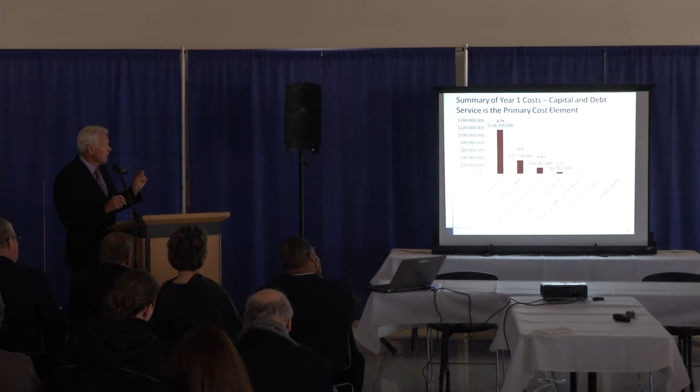Right now, this is high-level estimation. We haven't sat down and made a material list and an equipment list and figured out how many yards of concrete it's going to take and how big the pit is and all that kind of stuff. That would come with a more refined financial or feasibility study. But anyways, remember, your two big ticket items are your electric revenues, your capital costs, and your debt service. We're assuming 5% interest loans.

So we thought, well, what could we do to enhance the revenues or reduce the cost? And so here's a couple items that we decided to look at.

So we know we started your plant with unused capacity. That was the approach we took. So we said, well, what if we took all of that unused capacity and sold it for special waste at a 50% premium? In other words, you would charge somebody 1.5 times what you were paying to fill your plant up. Now, if you can find someone to do that, that would be great. So we looked at it for two cases: to use all the unused capacity, or to just set a limit of 10%, which is 400 tons a day, which is a lot of waste. So this might be a little optimistic, this might be pie in the sky, but I'll show you that with focused attention, you might be able to get there.

Internal use of all energy valued at 6 cents. We've been told that in King County, for people that do analysis of your water and wastewater utilities, they're typically assuming that you're buying power for 6 cents. That's your commercial rate, or industrial rate, actually. So we said, okay, what if we were able to use all the power from this plant for King County's water, wastewater, recycling facilities, public works, whatever you call it? And so we did an analysis of that.

Sale of renewable energy credits, if they were allowed, or additional electric revenue, 1 more cent. Suppose you were able to get 1 more cent, just a penny. Suppose King County had enough political clout that they could go to the local utilities and say, let's work a deal, we need a penny. Can you do that? I don't know. Get a law firm that specializes in this and give it a try.

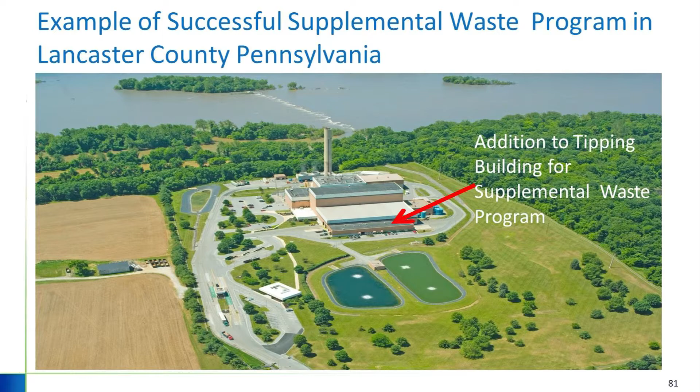This is what it's all about, let's do some brainstorming here and see what we can do to try to drive these rates down. So these are the parameters we looked at, and here's a real example, Lancaster, Pennsylvania, where they added a building especially, themselves, with their own staff. Covanta runs this facility, Lancaster County runs that little building there. They bring in supplemental waste from Puerto Rico, out-of-spec pharmaceuticals, costumes from Disney World, you name it. They have full-time marketers that are out there providing that service for assured destruction, and I've been told that they make, and I don't want to be quoted, $7 million a year in additional revenues. Okay? One little county.

But anyways, the point I'm making is we're using this as an option. Okay, so what are the results of all this? Oh, Hillsborough.

This is where I live. I used to work here for 3 years.

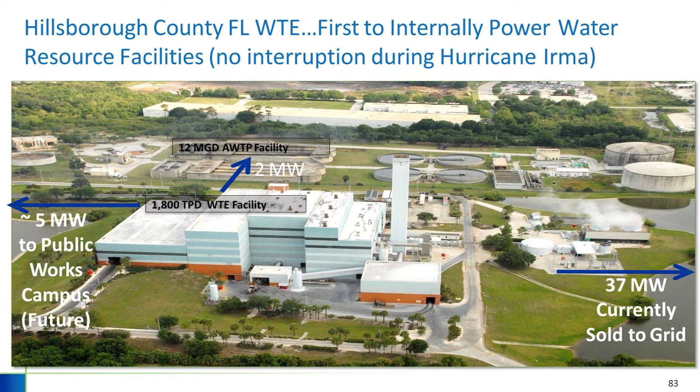Hillsborough has an adjoining wastewater treatment plant. It's not a big one—12 million gallons a day, using 2 megawatts of electricity. They also have a water treatment plant up the road that doesn't use much power either. They're thinking about providing additional power to their public works campus, which would be 5 megawatts. So at best, Hillsborough County can divert 7-8 megawatts of their power to their own needs and save a lot of money, but they're still selling 37 to the grid.

This is their campus—I call it a public works campus. It has a jail, the waste-to-energy facilities, the wastewater treatment plant, a bunch of admin offices, a yard waste processing facility, and more facilities further up, plus the water treatment plant. They own all this property, 240 acres, and they want to power it all up.

This is very similar to a concept called a microgrid, which is being promoted by the DOE. Microgrids are being designed now because of natural events like Superstorm Sandy and hurricanes—when the power goes off, the water goes off, the wastewater goes off, everything goes off, traffic lights go off. So they're trying to come up with more robust designs for these microgrids where critical infrastructure doesn't all go down together. Therein lies an opportunity—the DOE is actually paying people to do these feasibility studies. They'll pay you to look at concepts like this.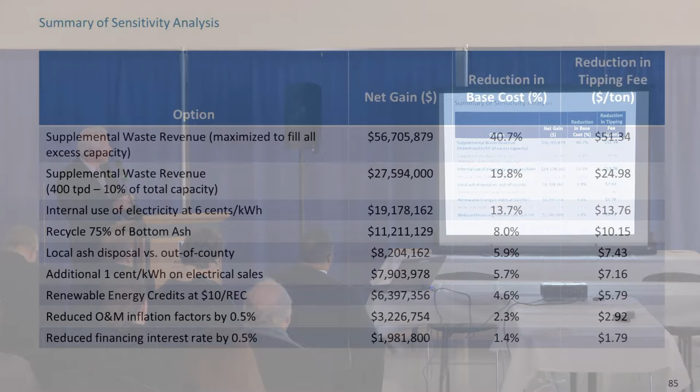Here's the summary of our sensitivity analysis. If you were to fill that plant up with all your excess capacity in year one, you could generate $56 million. That's a little hard for even me to believe, but that's the way the numbers worked out. If you filled that plant up at 10% of capacity, 400 tons a day with supplemental waste, that's still a significant number—$27 million in savings or increased revenues.

Internal use of electricity at 6 cents—that's a big number if you were able to use all of that power. Remember, that power is about 75 megawatts. I don't think you have any infrastructure that takes that kind of power. Maybe together it does, but if you were to try to power up all of your facilities, you'd have to go before the Public Service Commission and get special approval, because the only people that can sell power in the United States are the regulated utilities. So again, this is a little optimistic—it may not be realistic, but if you don't try, you don't succeed.

Recycle 75% of the bottom ash—that could be worth $11 million in avoided disposal costs. And that doesn't even account for maybe being able to sell some of those materials, especially to the cement kilns. They're buying all that alumina and ferric oxide and that sort of thing. They just might pay you if they agree they can work with it.

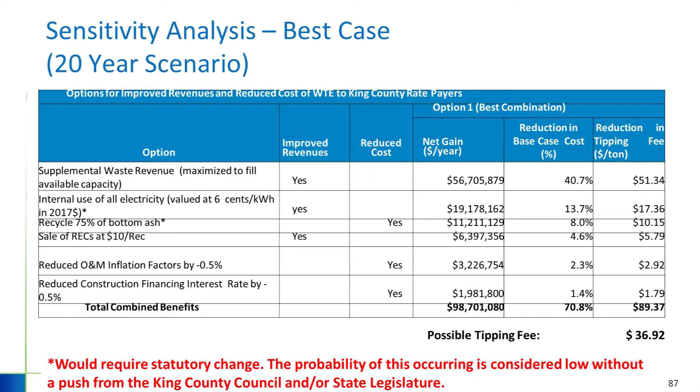Now that's really optimistic. This case here I called optimistic, where we have six of these—is that the same one? No, I call this one the best case, and in this particular case, your tipping fee would be $36.92. The next one isn't as profitable, so to speak.

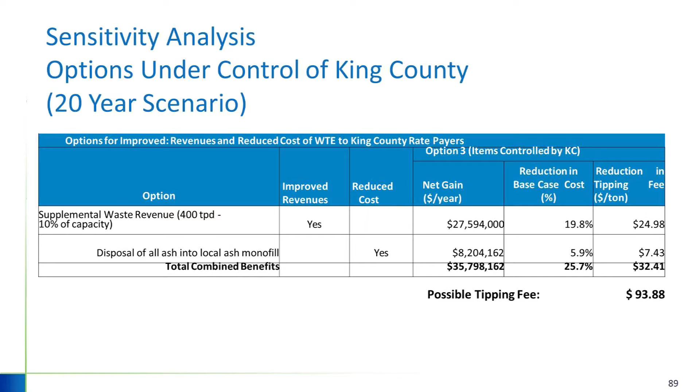This right here is under the control of King County. They could market the supplemental waste, 400 tons a day, and dispose of the ash in a local ash monofill. It shouldn't be too difficult. That would result in a tip fee of $93.88.

So there's various combinations, you can study it more in terms of our presentation. The conclusions: it's a conservative analysis. We used a lot of high escalators. We feel that we can refine these if you were to do a full feasibility study.

It's a large facility, oversized by anywhere from 28 to 45%. We used a modest sales price for electricity and the metals. So if you were to proceed and go forward with a feasibility study, you could look at starting your construction earlier, lowering your capital and O&M costs, looking at some higher revenue streams, and then report all the costs in 2017 numbers. That's kind of what we think we would recommend at this point.

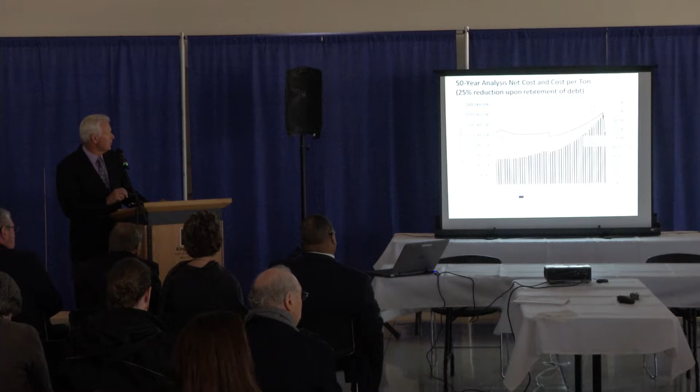Yes. And then the other point, you do have an asterisk about the 75% recycling ash - I don't know what slide that was on. You have an asterisk that says that's going to need... that would require a statutory change. That's important for everyone to know because that ash is produced now in Washington State and it has to go to a monofill. And those legislative changes may not happen - they may be difficult to overcome, that regulatory piece. But in Florida, they've already gotten permission. They put science together, had the right approach and test programs, and did get approvals. And Philip will tell you in Europe they do it all the time. But people have been trying for years in Washington State to get that changed, and it hasn't been successful.

And then my other point from the report: the capital cost to do this is $1.1 billion, is that correct? Yes. I just have a hard time with King County looking at that $1 billion number when we have such pressing social needs and other needs in the county. I didn't see that in this, but that's the capital cost number. That's correct, and I think that number's high because of all the escalators, and the fact that we didn't do a real fine-tooth cost estimate and breakdown of components and equipment. But it was meant to be - I hate to say worst case, but in the engineering world we have a base case, a best case, and a worst case, and in this case I called it a very conservative case, but it essentially would be your highest cost.

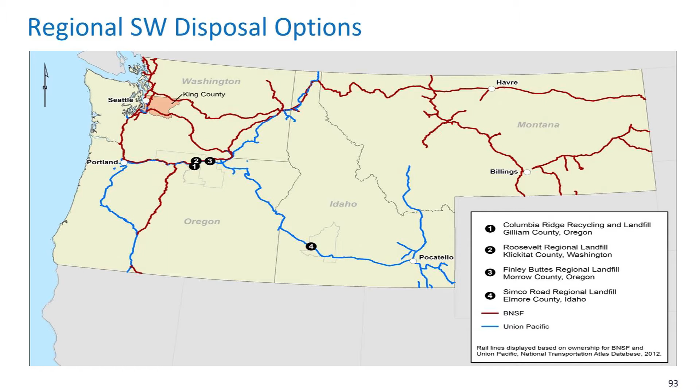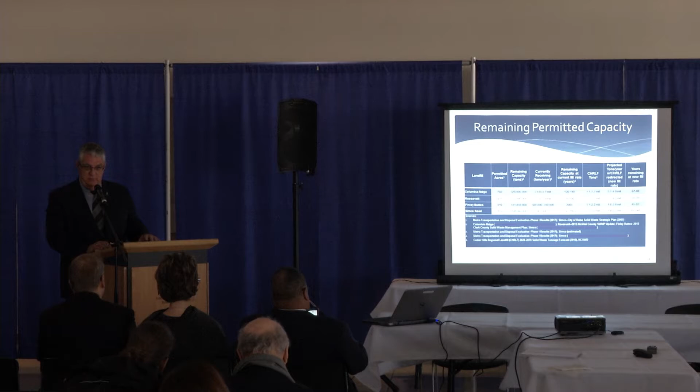These are the 4 you can see here: 3 in the Columbia River Basin and 1 down in Idaho, Simco. If you look at the remaining capacity for those landfills, based on their most current reports—which in most cases were presentations given to the counties and placed publicly, since landfills are sensitive about telling outsiders how much capacity they have—there's anywhere between 35 and 140 years worth of capacity in these different landfills based on their current loading. There's more detail on this inside the report.

Rail capacity, taken from the Washington State Rail Plan—the concern is that in the out years, by 2028, most of the rail lines that feed those 4 landfills will exceed their capacity based on the planned rail loading.

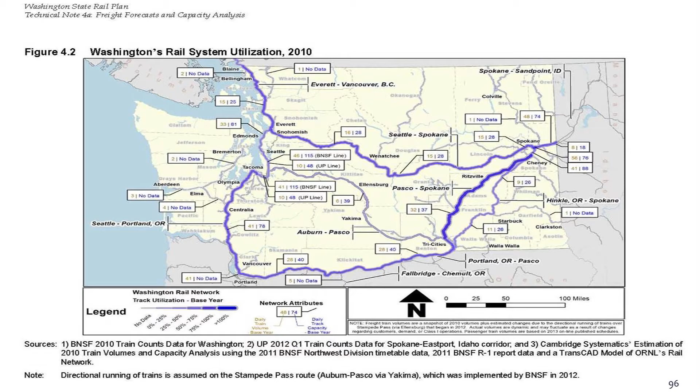Another way to see that: here are those lines with the current loads, and there's a scale on the bottom showing where they are relative to 100% of capacity. When you get out to 2035, within the life cycle we're talking about for these different waste-to-energy options, most of those lines—especially the western and southern route going from Seattle down towards Portland and over—are oversubscribed. Most of that line will be over 100%, and in many cases over 130% of the rail line's capacity.

Supply and demand says that if there's not enough supply to meet the demand, the price goes up. We didn't do an analysis of that cost, but if you don't have the capacity to meet the need, the price per ton to ship the material will go up as well. So just a caution on export: there is capacity in the state, in eastern Washington, to take the county's waste if that's an option the county chooses. But we'd warn that unless there's much improvement to rail capacity in the same period, the cost to ship material will go up as capacity on the lines is exceeded in the future.

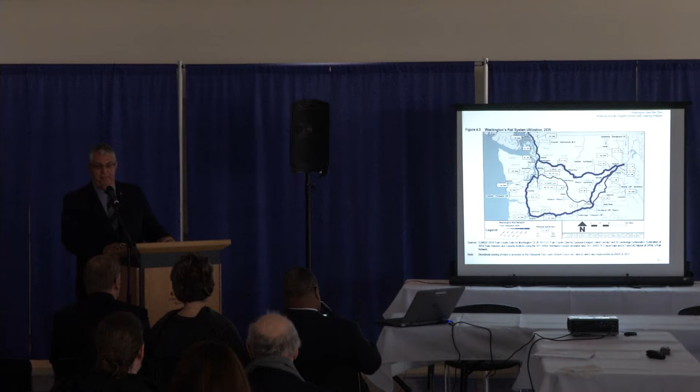So that's really short, and we want to get back to our recommendations on the waste to energy option. As we discussed at the beginning, we did a cursory top-level review of what a waste to energy facility might look like for King County, without going through all the scoping process to site it and look at all the other factors that would go into that.

Just for a generic facility, we determined that mass burn combustion on movable grates would be the best fit for the county. In order to explore that, there are several things that would need to be done before you could refine the pricing and determine the siting, and we'll make some recommendations specific to doing the feasibility study for it. Through some of the questions we've heard today, it's clear that if the county wanted to do this, there would need to be an education process put in place to explain the pros and cons associated with waste to energy facilities.

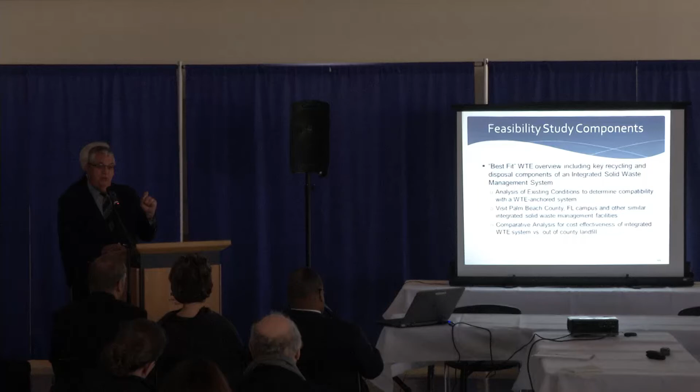And with that, to talk about the feasibility study components to get into more detail on costing and siting waste to energy, I'll return the mic back to Paul to finish that out.

Okay, I'm going to be quicker than I was in the past. So we've already talked about the best fit. One of the things I would recommend we look at here is the analysis of your existing conditions to determine compatibility with a waste-to-energy anchored system.

For example, you have 8 transfer stations. We've only talked about 1 waste-to-energy plant. It could be 2 or it could be 3 for as much waste as you have. What if that one facility, what if a small facility was close to a transfer station? Well, then you may not need that transfer station anymore. There might be system savings depending on the site-specific locations.

I was thinking there was another example of where your system might be reconfigured. By the way, where I live in Hillsborough County, Florida, just this year, the county finally figured out that running their transfer trucks at night would increase productivity, because they're stuck on the interstate system most of the day. So they're now running trucks at night, and the facilities are open 24/7. There's no hardship in spreading the load out over time.

And then analysis of options for the appropriate sizing of the facility. Sizing affects cost, cost affects affordability. I wanted to point out a couple things here.

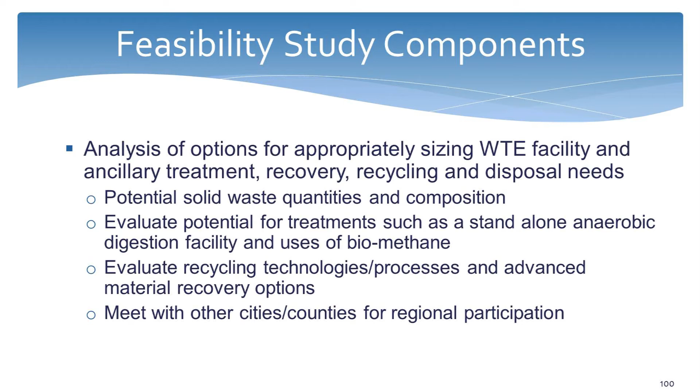Evaluate the potential for treatments such as a standalone anaerobic digestion facility. That's for food waste and organic waste, high-strength organic waste, that could be diverted to a digester. Some of your wastewater plants may have digesters, they may have capacity, or they could be modified, so you could get your wastewater brethren to get in the game with you and take on some of your solid waste into their system, which frees up some capacity for you. There are other new technologies out there you might want to look at.

As part of an integrated system and an integrated campus, there's a new waste plastics to liquid fuels facility in Akron, Ohio, being marketed by a company called Vadxx, V-A-D-X-X. We hear about the National Sword and the Green Fence in China and the lack of markets for recyclables coming down the road, maybe affecting your communities right now. So if you can divert some of those waste plastics into another market, that might drive down the amount of waste you have to process through your waste-to-energy facility. There are all kinds of new technologies out there that are little pieces.

Okay, so I'm not going to really go through the rest of this. These are just elements of a feasibility study that would go into detailed analysis. We would look at the siting and architectural options, the priced energy, the availability of local markets, technologies for processing small amounts of your excess waste, whether it's additional composting or waste to biofuels. E-waste has far more value in terms of recycling revenues than burning it, so you might want to look at some of those things and take apart the system a little bit more.

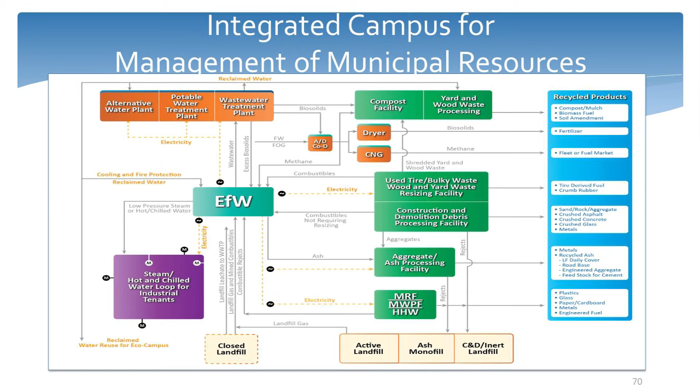It includes water treatment facilities, which, as we saw in Hillsborough, are sending power to these facilities, and we could have an anaerobic digester either associated with the wastewater or standalone. We have compost facilities, wood waste and used tire shredding facilities, and an aggregate ash processing facility.

As you saw from what we presented today, it's real. They're doing this in Europe today.

We could have a mixed waste processing facility. In the old days we called that a dirty MRF, where you could take one of your transfer stations and convert it to a dirty MRF to make a product known as engineered fuel, which may be something of value that the cement kiln would want as a fuel, not a mineral, or other facilities—standalone power producers may want to procure that as a substitute for coal or co-firing with coal. So there's a whole host of activities.

And then, of course, you have your complement of landfills that are alive and well, and your closed landfills. Part of what's shown there is you could mine the old landfill for combustibles to recover capacity or space—that's been done in a few locations in America. And you can take the leachate from that closed landfill and use it for process water.

By the way, EFW is just another version of waste energy—it's energy from waste. And then you could have a steam and hot water chilled loop for industrial combined heat and power. In a nutshell, I don't have an electronic waste recycling facility in here, and I don't have waste biofuels in here. This is still a work in progress.

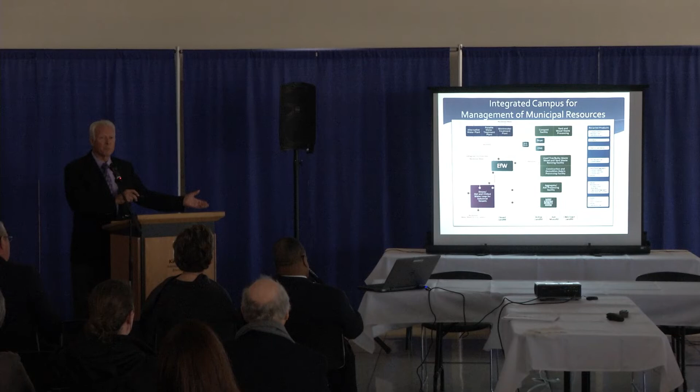You get to pick, you get to design it. It's your community—what do you want to do? How do you want to manage your waste? So all I'm saying is, here's a snapshot of what it could be, and it could be even more grandiose than this. So thank you very much, Paul.